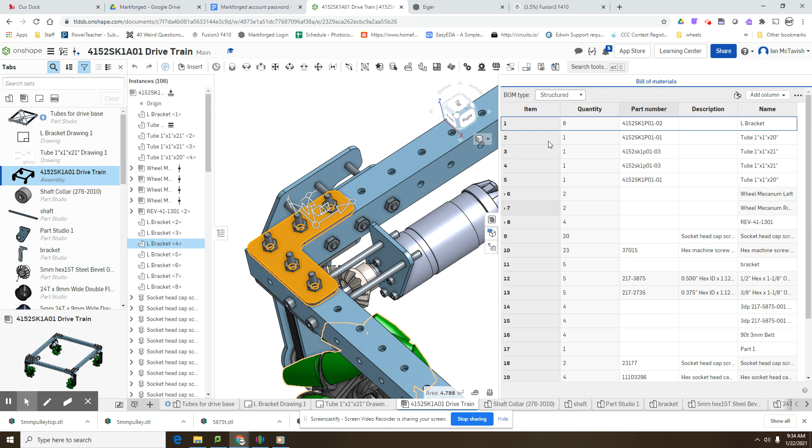So this is how to prepare a part for cutting. Once we have a part, so this L bracket we've decided we're going to use, we go to the BOM table and we make sure that that part has a proper name and it has a part number. And if it's missing the part number, because we're making the part, it should follow our convention. We look for the largest number and we just add to it. So we've got to clean up the part numbers in here.

That's okay. Now, handy trick: you can right click and switch to the part studio so that you can quickly get to it. So there's the part and it's highlighted, and we do a quick double check. Do we have the material assigned to it? Yes, we do, and we're good.

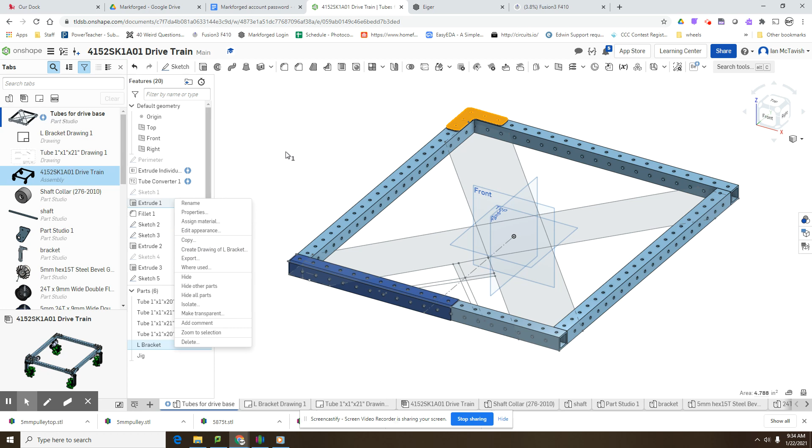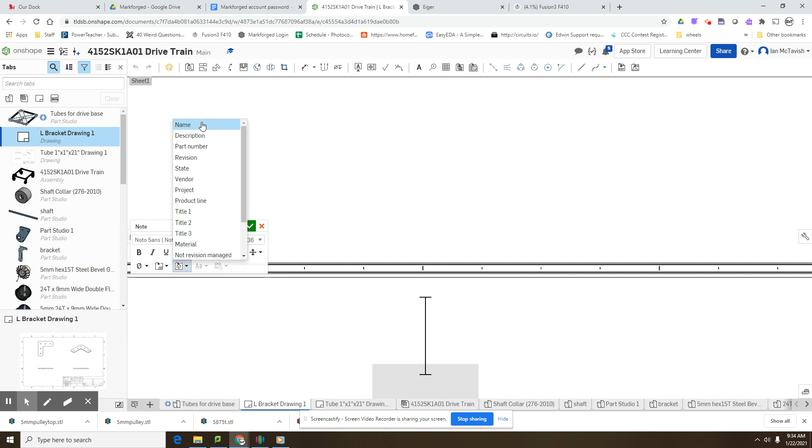So the next thing is to make a drawing, and we can right click, create a drawing, which I've started. So here's the drawing for this part. Now, a couple key things. First off, our title. We have a template. Right now we're doing ANSI B for the drawings, and I'm going to switch that to a template so that these things are automatically filled in. So you see I right clicked on there, deleted the 4 dashes and switched it to the name.

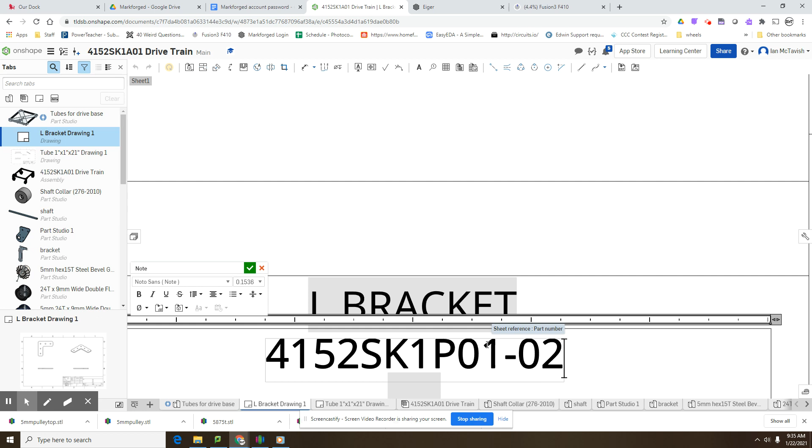The next part is right below it: right click, edit note, and we are going to add the part number. And we'll delete the 4 dashes. So there we have the name and the part number. That's the most important part. It should show your name, that you have drawn the part. And the key thing is that once we print this off, I want people to sign off on it, that they have seen it. So here's the part.

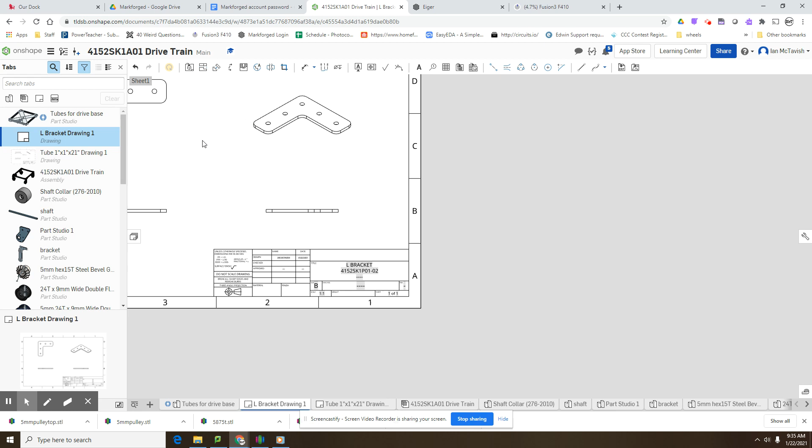So we need to get some dimensions. Here's the dimension tool. The key thing when we're on the CNC is we need to know how big a piece of material we need. So I'm taking the maximum spots here and working out how big this piece of material is. The other thing is with holes, we need to know the diameter. So we click on the diameter.

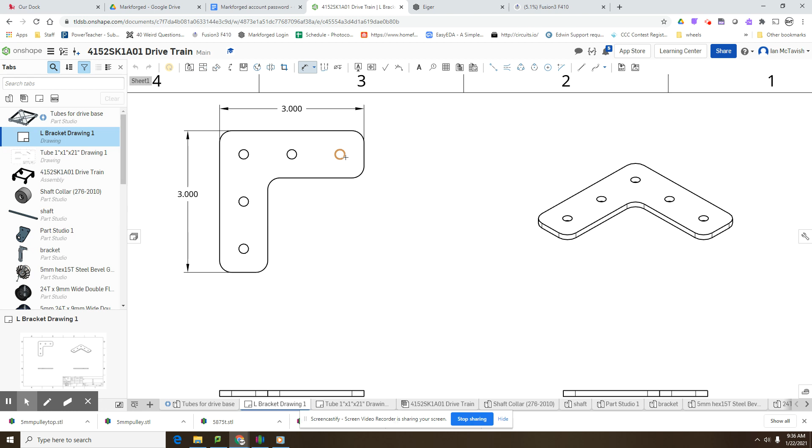Now, a couple things. It's easier to make sure that we switch it to fractions. But when you do that, switch the precision. We use 13/64 for these holes. So make sure that you click the drop down so that you can select 64ths for precision. So there's the diameter of the holes.

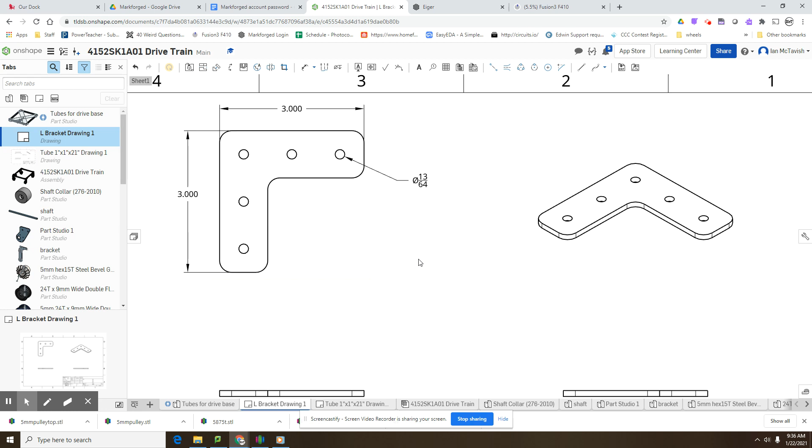This is getting cut on the CNC, so the CNC machine will have all the details there. We do need the thickness of the material. And so there's that. And that's good. If we were doing this by hand, then we would need how far the holes are positioned and everything. So those are key things.

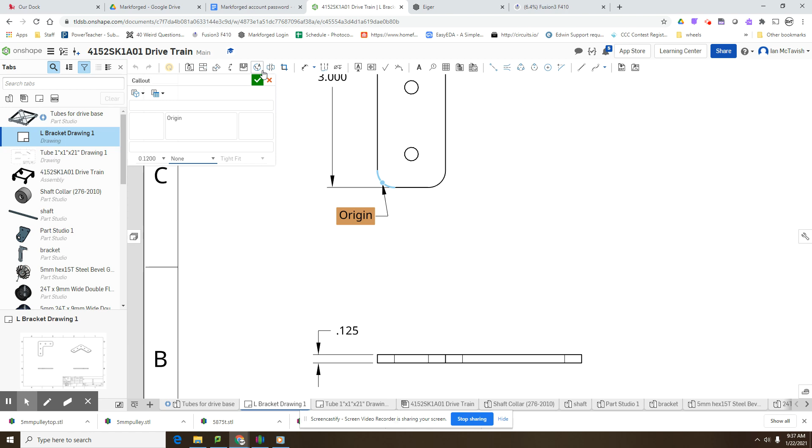Now, we do need to set where the origin is going to be. I find it easiest to just use the callout tool, and we need to pick a point, and we'll just get rid of the circle. Just double click that, select none. Okay, so the origin, typically we want a corner so that then we can set the origin on the CNC machine and make sure that we've got that space.

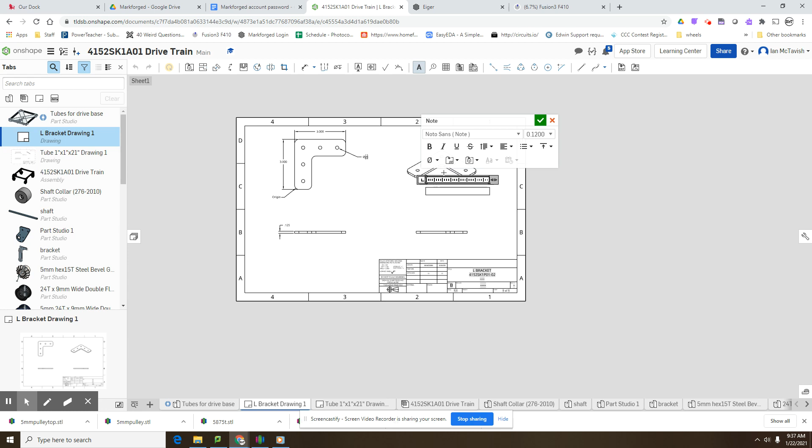With the notes, let's add our notes here. So we need to plan for this. This particular part has holes. So the very first thing that we're going to do is drill the holes. 1, 2. So this is pre-drill.

What's the name of the tool? Oh my gosh, I'm drawing a blank.

So basically what we're going to do is, we have a little tool. It's like a drill bit, but instead of drilling a hole, it just puts a little divot. And the reason for that is that when the drill bit then goes, it's going to get sucked into that divot and not wander as much. So we try to use that one first, and then our second thing will be drilling. We'll drill with the 13/64 bit, and then our third task.

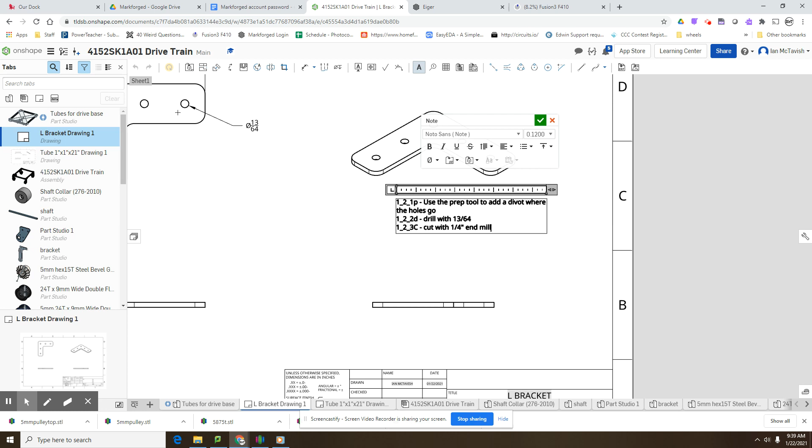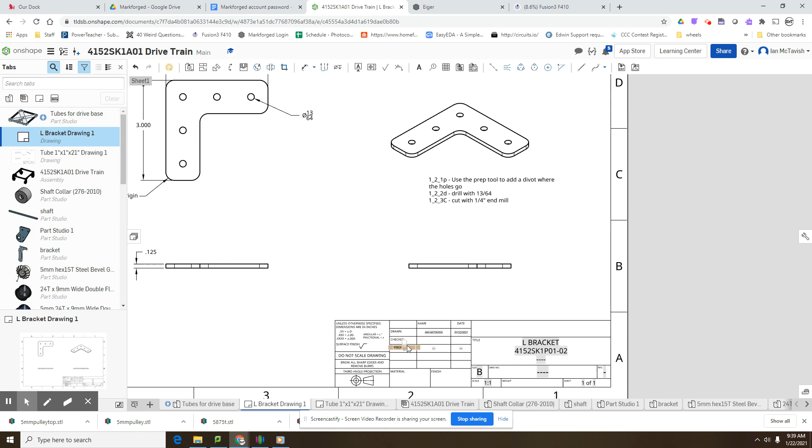So these three programs, we'll have 3 tool changes for this, and that gives us our programs to do. First thing is prepping everything, then drilling, then cutting. So this is done. That's fantastic. We need to now print this, and a couple things to do. Number one, when we print it,

I purposely left that to show you: depending on what computer you're on, if it's blocking the pop-up, that's how you get around it, which is just something to know. So 2 things that we do. Number one, we're going to print this as a PDF. The reason for this is that you can do this at home. You can print it as PDF and upload it to our Google Drive, so that way we have a folder for all the parts and we can keep track of it.

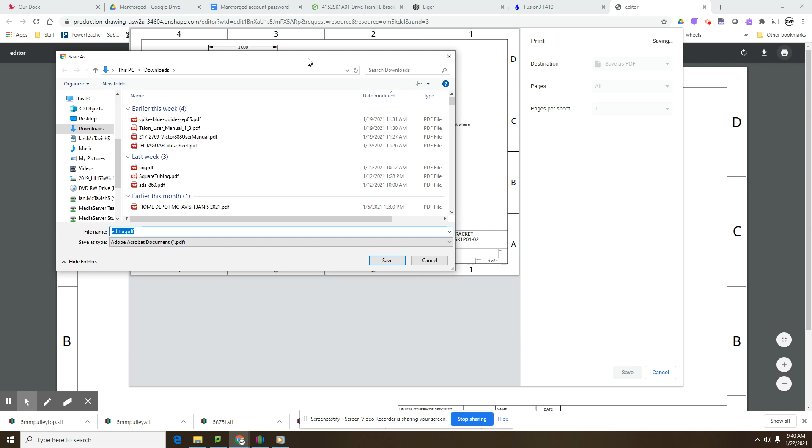So the key thing is what the name of the part is. 4152 SK1 part 01-02. So that's the part that we're printing. We're going to save that part, and then if we're at the school, we can print to the library printer so that we get it. The paper size is 11x17, so we can do that. And because I have access to the office, I can also select the office printer.

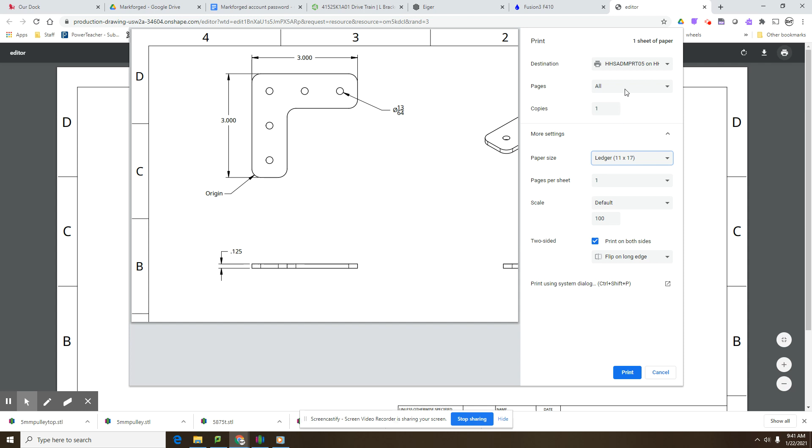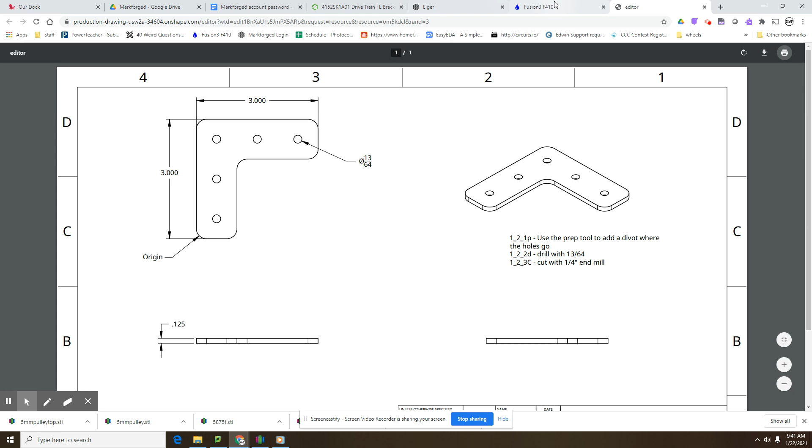So we keep a paper copy of everything that we're using so that we can keep track of which parts have been created and how many parts. The one thing I'm missing on here is the quantity. I should add that in the notes for that particular part. So that's how to prep that. And then the next stage is, go back here.

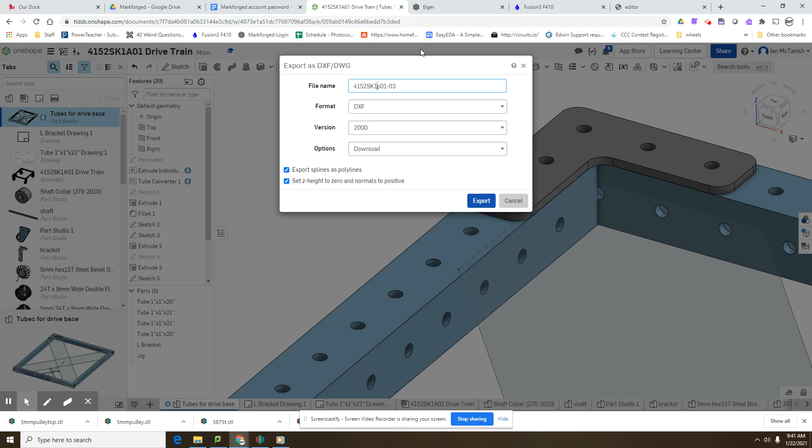Now I need to go back to my L drawing. What I'm going to do is right-click the top face, and I am going to export that part as a DXF. So there's the DXF. I need to upload both of those to our shared Google Drive so that way we have those parts ready to go. And then that's the part that gets brought into Fusion 360 to prepare it. That's it.